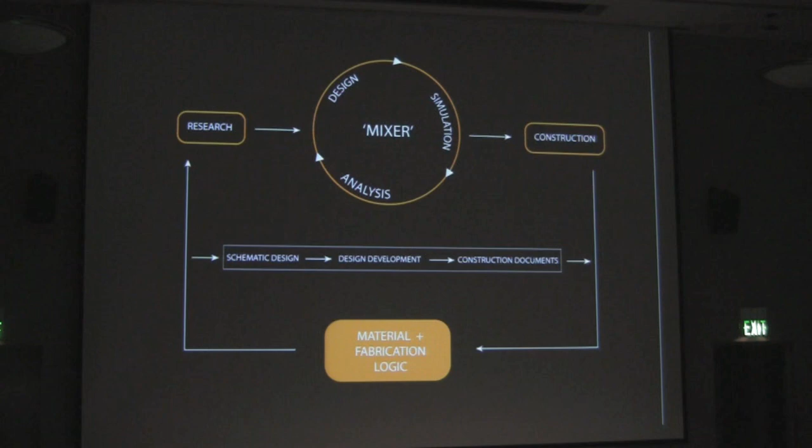So the case studies I'm going to show you really are, how do I embed this materials and fabrication logic into digital methods, really test these things for fitness through the analysis and through the simulation, to ultimately arrive at very innovative, very complex projects, but projects that ultimately can be resolved with traditional engineered materials.

Some of you have probably seen this project. I've talked about it before, but I think it's exemplar in trying to explain what I'm talking about. This is Janet Echelman's project in Phoenix, Arizona. Her secret is patience. For those that know Janet Echelman, she works in netting, fishing, trawling nets. And this is a very, very large one in downtown Phoenix that is effectively suspended by some hoops.

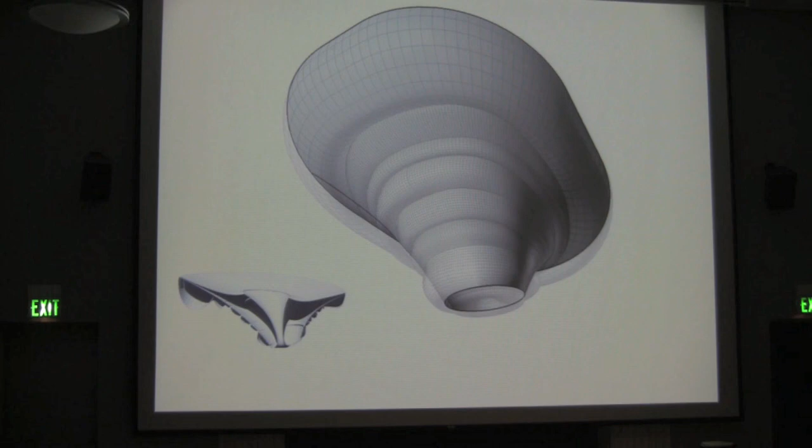It's composed of 3 layers, which is a central cone, an outer structural shell that holds it into place, and then this kind of lofty geometry that's almost like skirting. So it's 3 layers. The important part for an engineer is really that middle layer. That's the piece that holds it into shape and gives it its geometric positioning in space.

To think that you're going to actually knit something like this and know it absolutely, right? Because the building department says, okay, what is it? Define it. Is it going to actually be like this? How do you do that? You're not going to draw that. It's just not possible to draw that. And so working through digital methods, we did exactly that.

We went through and we talked to the fabricators. We talked about how you make fishing nets to understand what fishing nets are. So this is the modern trawling net, or a Euronet. This is a net looming machine. And the only information you need, you can make whatever you want in netting, with the proviso that you can actually give distances between knots.

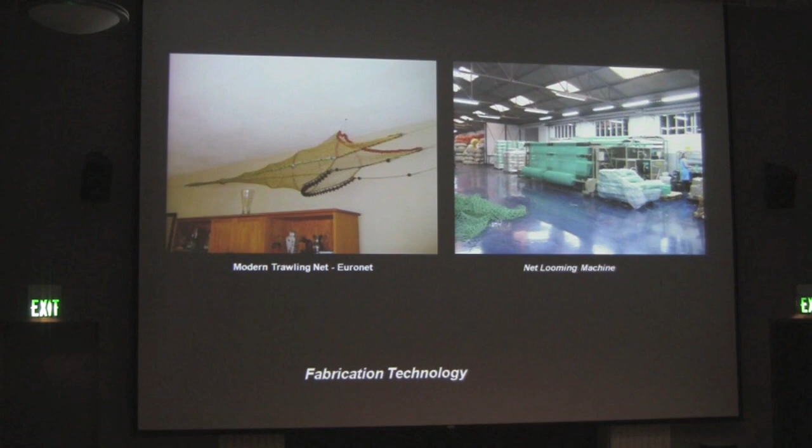That's all you need. So if I can describe that geometry and I can isolate what the distances are between knots, I can generate any complexity I want. And so that's the process. So arriving at how to get there is the challenge. So there's a looming machine, the netting. And this is just a visualization of an Excel spreadsheet. The Excel spreadsheet was all we had to provide as a deliverable to make the project.

The process is we wrote a whole series of scripts that we're going to embed in Revit. So much of what I'll talk about tonight is very much tool development. There is no bespoke piece of software out there that's a solve-all for anything. And so I've always had the vision and the position that my studio would be always software agnostic, meaning we're going to use whatever is the best tool at the time, and we're going to mix and match, and what's not available, we're writing.

We're going to script it, we're going to code it, but we're going to build that tool to do that process that's going to arrive at the project that we ultimately wanted. So this is the development of that tool in Revit. It ultimately culminated in this piece called the Echelman Net Layout Tool, which is nothing more than a drop-down in Revit, shockingly. And this piece will allow us to describe that geometry, then extend or throw or cast netting across the surface, and then we can find those nodes of the netting.

And this just shows how this thing gets woven together. You get layers, so you get rows that are stitched together. And you can see the coloration. We did a whole series of mock-ups to actually test that the logic held. So in a digital process, something like we're proposing here, you're going to produce an Excel spreadsheet and just run it through the machine and hope you're right. Boy, that's a mistake. Make sure you mock up. The mock-ups are really important. You test. You always go through this process of digital testing, digital mock-up, physical testing, physical mock-up.

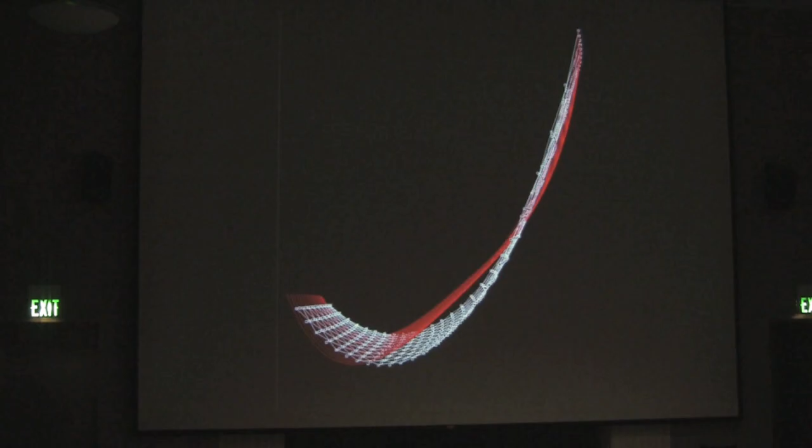And for the artist, they're only interested in the final shape. How you get to the final shape from the shape that you need before it relaxes, that's a challenge. So we had to go through that process. So this is the form-found shape, and you can see it starts to drape. So you see these little puckers coming through. Then the structural netting. This is the piece that attaches to the main ring and then drapes down. This principally carries the structural loads.

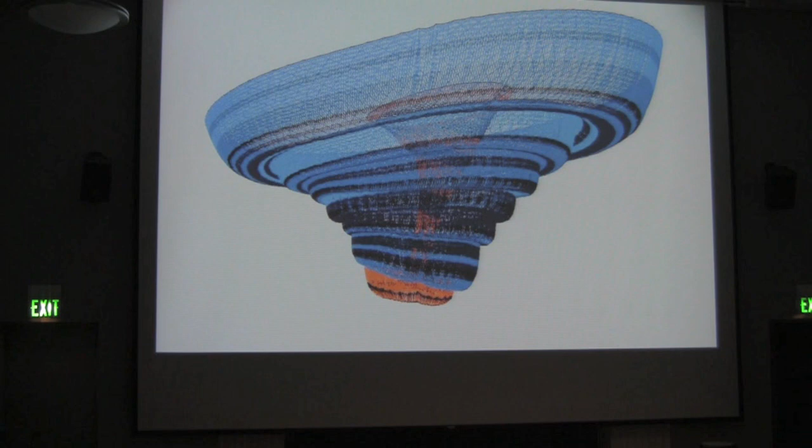And then effectively what is the piece, what gives it its form, is these drapes, these pleats that effectively fall down and are colored. And the coloration are the strips or the bandings that define it. So you can see the layers building up. So this is a structural analysis. Because it's data-centric, because it's a data-rich environment, we can bring that geometry directly into our analysis software. This is actually Robot, which is Autodesk's FEA solver. And we're looking at stresses within the nylon cords.

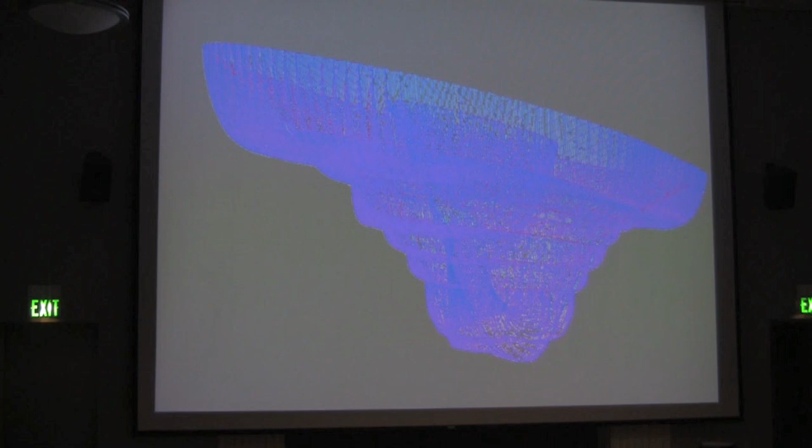What's important here is actually, again, that interstitial layer, which is the larger diamond pattern. That's the piece that's actually going to hold it into shape. And so we're just pushing this data between one platform, being Revit, pushing it into the analysis. So we're not creating two models to get that shape. We could then do additional analysis after we had that whole piece done. This is looking at wind. So that's 30, 60, and 90 miles an hour wind. Obviously in Arizona, everybody's concerned. So we could understand what that behavior is actually going to be like under these load cases.

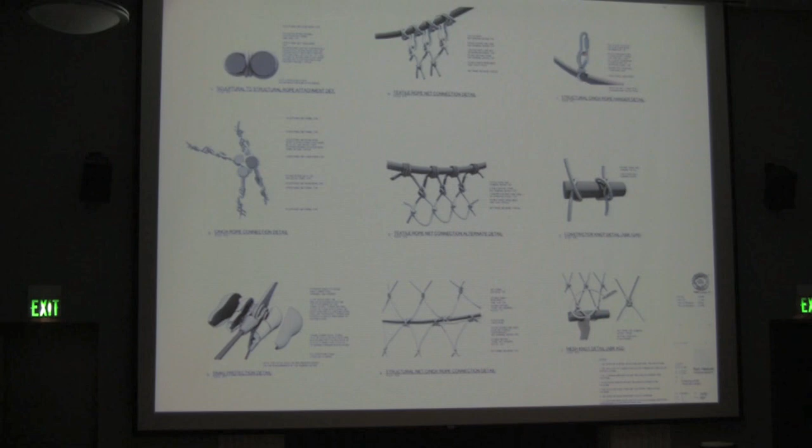Any jurisdiction is going to want documentation. And whether it makes any sense, whether it really tells a story or not, you still owe documentation. So here's your plan. You get a ring and a ring. You get some pretty pictures. Say, we need some nets. We have distances between knots, so that geometrically describes it. The hoops to tie it all together, and some details, and we pulled a building permit. So we pulled the building permit, and this is the piece actually installed.

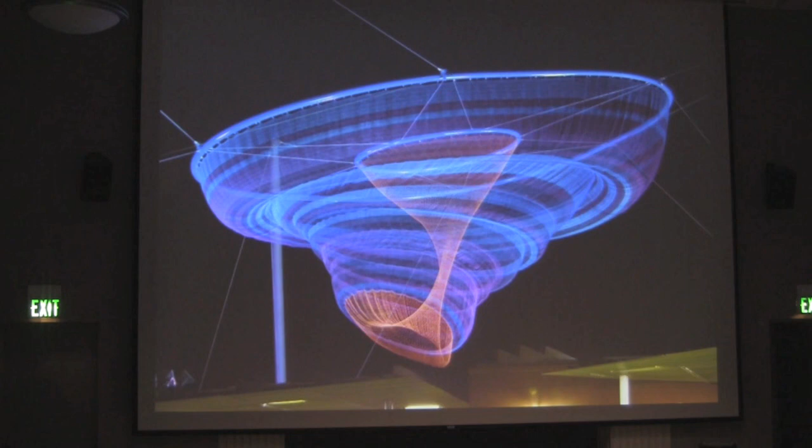It's suspended in the air by 3 masts, and then the hoops. You can see the hoops going in. There it's lit up. Inside. It simply arrived in a truck. So they made it in Europe, put it in a container. Container got on a trailer, pulled it out. It took longer to put the masts up and hang the rings than it took to hang the net. The machine knit all of that netting within 2 weeks. So purely off a digital piece.

The next project I'm going to show you, it was a competition. This was at CCA, California College of Arts in San Francisco. This is the architecture school there. A firm called Buro gave a proposal. They had a skylight issue. This solved the skylight issue. Very bright light coming through the skylight and creating glare within the space. They wanted to fill it up with something that actually would diffuse the light better.

So Buro came up with this design of this faceted kind of paper-like lamp shade piece that was going to fill the space. They won it. They won it with no engineering input or anything like that.

Well, a friend of mine, having worked at Wes's office in San Francisco, he called me up and he said, I have a friend at CCA. He won this thing and now doesn't know how to do it. It's a complex thing. It's kind of curvy, doubly curved. What does he make it out of? What's it of? How do you do it?

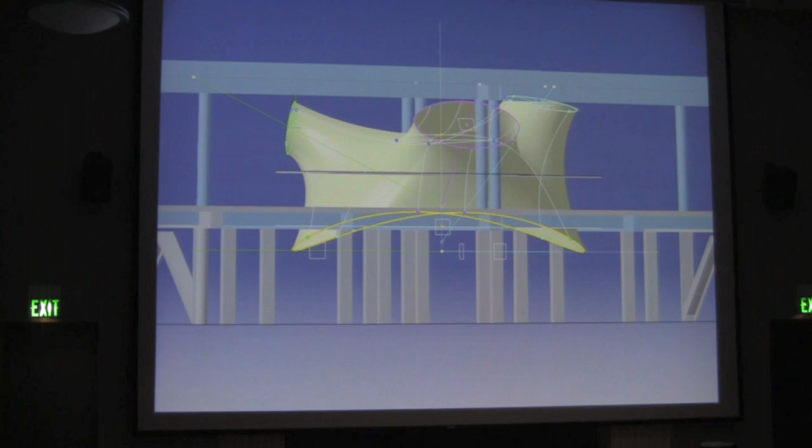So this is the CATIA model that effectively describes the interrelationship between the building and the piece in a sectional case. We work often on these very complex things operationally between Rhino and CATIA from a geometric point of view. It's just a way that we can manage precision, work out some of the ideas, and then lock it in a parametric way. So this is building up the principal geometry of this light shade.

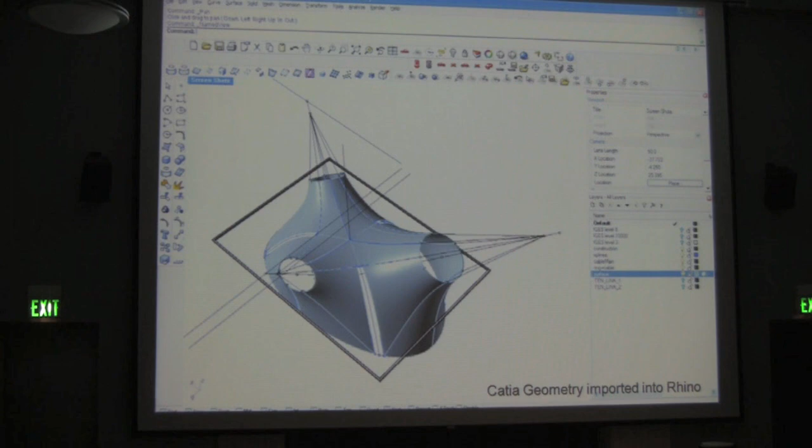So here's the CATIA geometry, defining it, and I'll talk about how we get to the cable net. We've got CATIA geometry, and we're going to import it into Rhino. We're going to tear that geometry now apart. We have the principal lines of curvature between the two openings. These are the hanging points, 1, 2, 3. This ring is actually what we use to tension the whole thing.

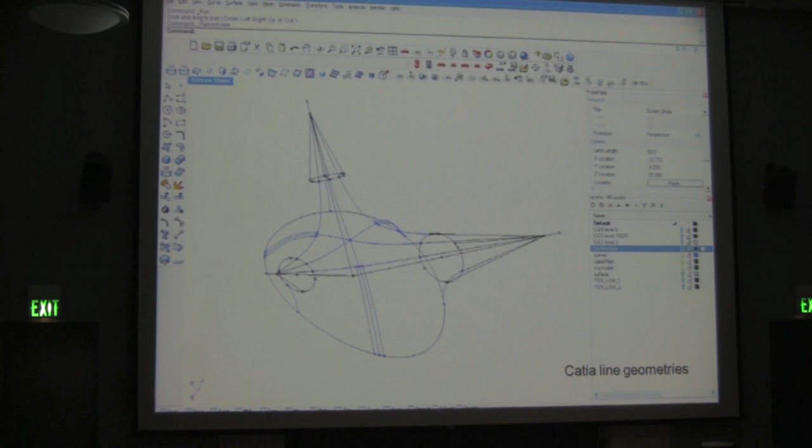So cable nets, if anybody knows what a cable net is, it's got to be tensioned to lock in the pre-tension. And then we got the primary geometries described. Governing geometries, obviously you've got the 3 rings from the top that actually get locked into space, and then the cable net gets hung from that, and then you got the lower ring, which effectively pre-tensions the whole thing. So you've got your governing geometries.

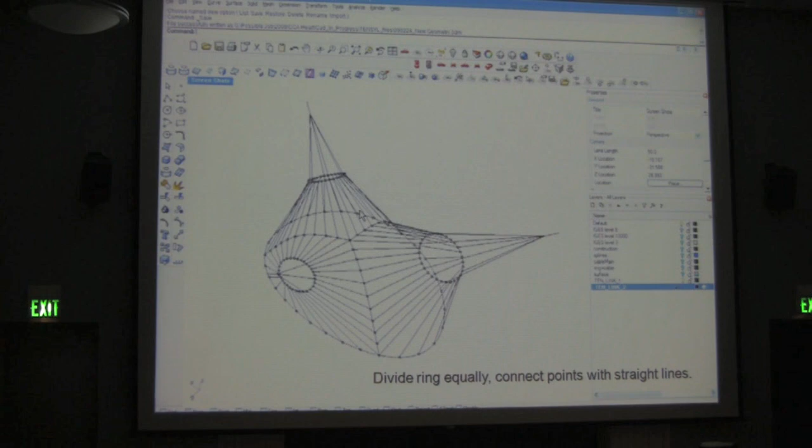We're going to now develop the cable net, which is, we're going to subdivide the geometry, so you can see the subdivision, and we're going to break this into equal node points, and then drag a cable net line across, so we got transverse geometry. Now we can panelize this thing. So this is going into Tensyl, so we have a cable net, and we can actually relax this surface, so we're going to form find this thing.

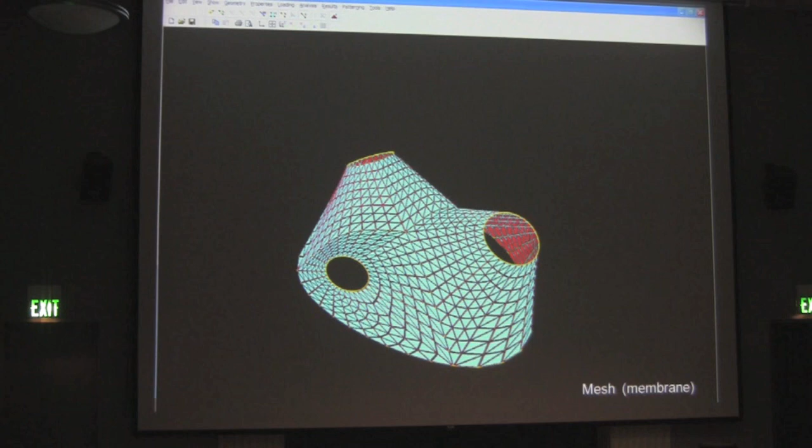We've got our fixed geometry, which is locked. That can't change. It's a rigid element. We have our interface conditions between the primary geometries. We've installed the mesh, because we're going to panelize this thing. We've got the support conditions established, and we form find it. So that's a relaxed shape, right? So everybody saw the surface make the step.

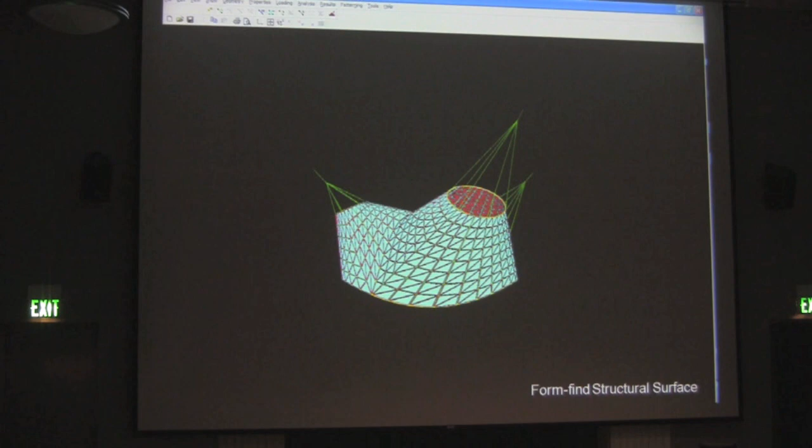Here you go again. You can see the hard line of the cable net, the principal linking geometry between, and it relaxes. So again, that's dynamic relaxation using Tensyl. And just one more time, you can see it relax. So now we have all of that. So we found this surface. We have a cable net defined.

We now need to do the FEA because we're going to switch out cables, so we can't guarantee that we get pure tensile forces through a cable. We're going to put it through panels. And the trick is we're actually ultimately working towards HDPE, which is a plastic material easily cut from a laser cutter. So we can actually panelize this thing. And you'll see the madness in going to that. We want to do some tricky stuff with what the surface ultimately becomes. So we import it into FEA.

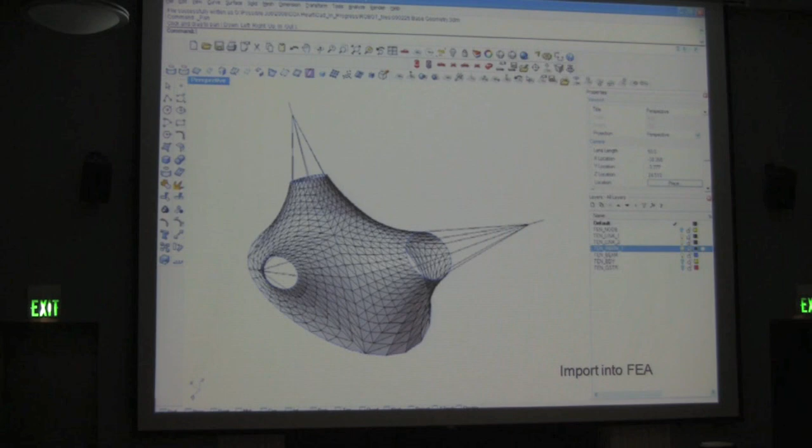So it's a nonlinear cable analysis. So we first look at the cable analysis, look at the stress in the cables, look at the jointing, make sure that we get what is the connection between the panels? Is it one rivet, two rivets? How big is that rivet?

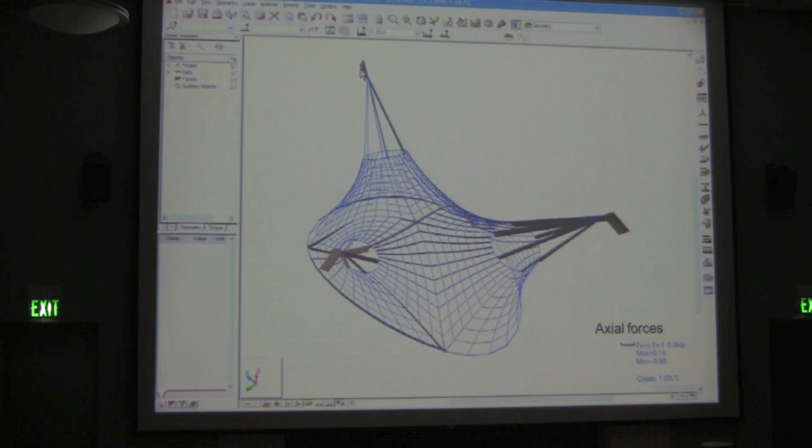We get the axial forces defined within the support conditions. So these are cable-tied rings. So here's your ring, here's your cable, that's your fixed point. And then we can find the deflected shape. Ultimately, in these types of structures, you're looking for the solution with the least deflection.

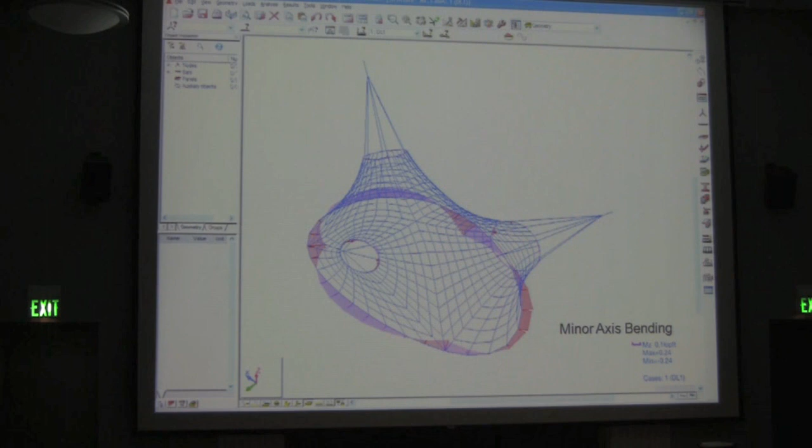Ultimately, a form-found structure has the greatest level of stiffness, and the deflected shape will be the least. So that's the deflected shape. The bending axis, this is bending within that ring. So imagine the cable net's now pulling on that, and that ring is going into compression. Again, minor axis bending.

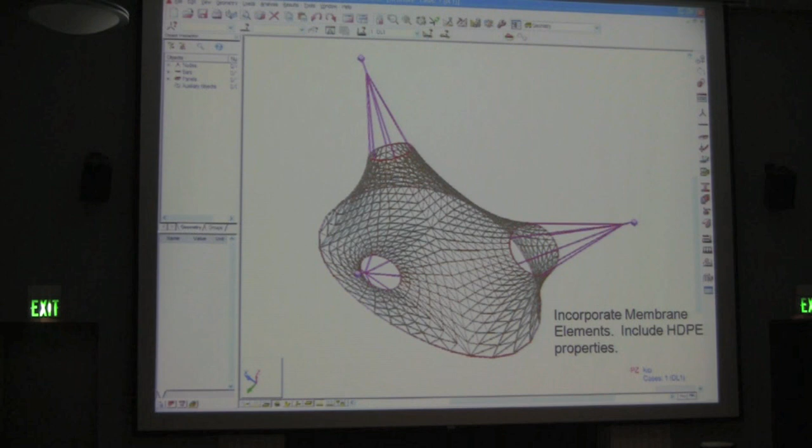So we've now incorporated the material properties into the model, effectively putting in membrane properties. So this is the HDPE plastic. And again, we're going to do this again. So there's a rigid panelization in each one of those membrane elements, looking at the deflected shapes. You can see this kind of dark shading piece. That's the offset from theoretical, yeah?

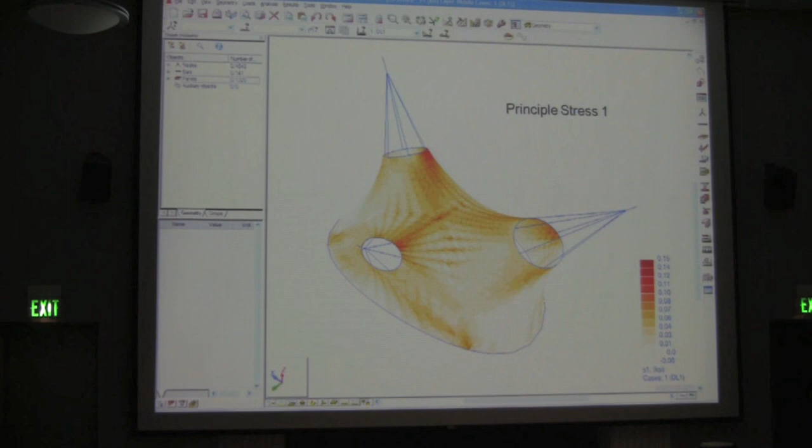Or the deflected shape. So the axial forces, so we're going back through a process of confirming that. So you got the reactions, right? So now we can properly size the connections. And then looking at the principal stresses, you want a good uniform character to these surfaces and the stress profiles. Principal stress 2.

So I said there's a method to the madness of actually going to the membrane. Why not just leave it a cable net? Well, because we wanted to panelize it. We wanted to use panels, and we wanted to do something nifty. Initially, the surface was just these overlays of plate material. We talked and talked and said, well, what happens if this could be furry? And so we devised a way that if you cut these kind of Cs and you bring them together, you get this kind of a loop effect, and it becomes this furry surface in the process.

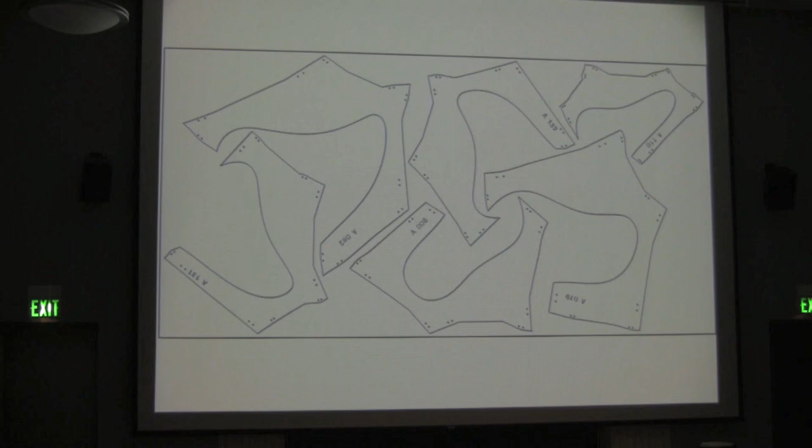So this is just the panelization and the element development. So this is one panel ready to be sent through the fabrication process, CNC. And here's it going installed. So each one is uniquely numbered. And you can see how the furriness happens. Effectively pull it together, and the surface bends out of shape to create this furry characteristic. It's quite tight, right? This was built by students, so it was one of those very, very interesting projects to work with students.

Well, how do you design something custom for a big rock like that and know that what you've designed is ready and able to actually load up this big rock? Because you've got something that's very unique from a geometry point of view. Well, we scanned this rock. So we scanned it digitally. They lifted it up, they scanned it, and we got the digital information.

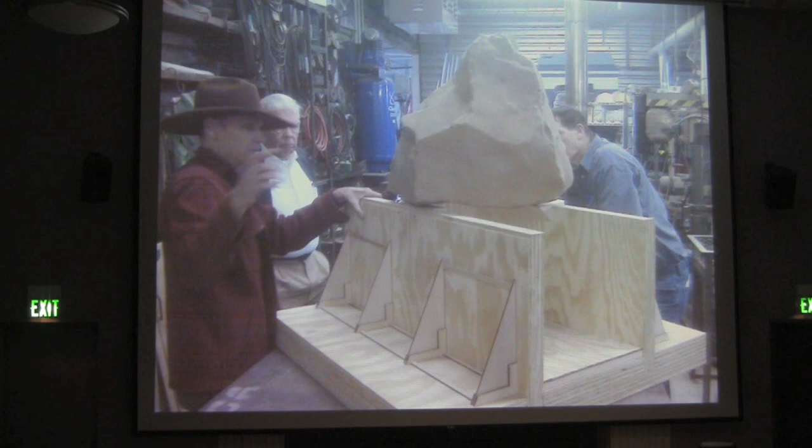So this is my first meeting. That's Michael Heizer in the hat, out in Nevada. You have to fly to Las Vegas and then drive 6 hours to go see him out in the middle of the desert. He's completely off grid in an outpost, just making stuff, and it's really incredible. And he's old school. He's making stuff by hand, super, super precise. He'd never worked in a real digital process ever.

And this had to happen. To take a rock and move it somewhere and know you could just drop the rock on this trench idea was a big step. So this is his mock-up. This is the idea, and you can imagine this conversation. I have this big rock. I want you to engineer me a trench so I can drop the rock on top, and I'm going to call it Levitated Mass.

It's funny until somebody realizes that that costs millions of dollars, and you're either right or you're wrong, yeah? And that could be a real big crisis. So we scanned the rock. How we got the rock is actually through that 3D scan. So I showed up with the rock. I had the rock scanned, and I came on the plane. People looked at me very funny, holding my rock. And then I showed up, and he had this trench, and luckily the rock and the trench somehow met.

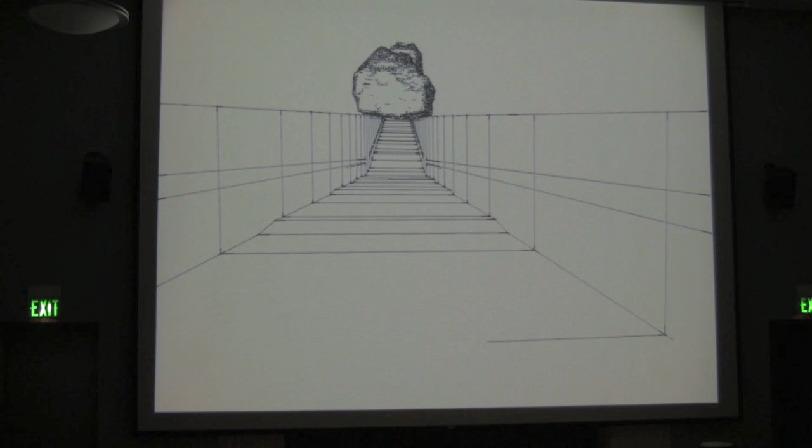So this is Levitated Mass, the rock, the trench, and you're supposed to walk under it. There's your sketch. There's under. And there's the lay of the landscape. So that's plan, right? That's all you get. That's the idea. So we had to be very specific.

We had to have the digital survey. We have the site, right? What is the run? I mean, there's all of this geometric information that has to be embedded. What's the code slope for a ramp? What's the code slope for a landing? All of that stuff had to be plugged in to actually develop that. And that had to be presented because there was an idea of art, and how do you merge the two and make everybody happy. And you can only imagine my conversations with the city.

I want to do a rock. I want to take a rock. I want to put it over a trench. I need a building permit for this. What do you think? The juggling, and ultimately what they said: this is a building. By the way, the city understands this as a building. We pulled a building permit for it.

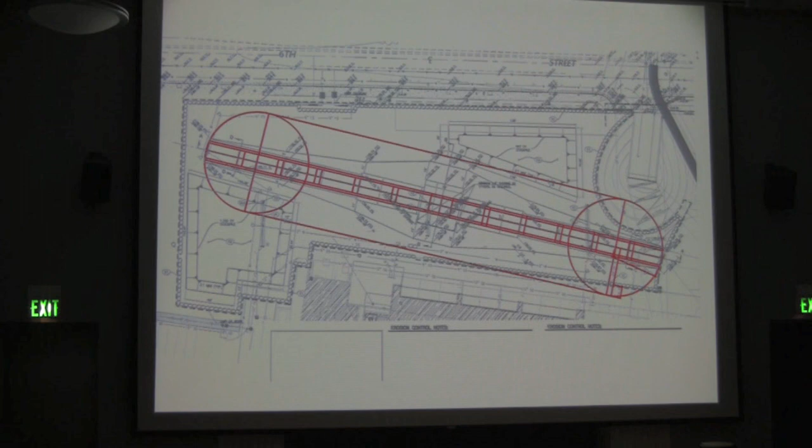So we built a Rhino model, we kept everything in Rhino. We have the geometry, which was a 3D scan, and we could work with and ultimately evolve this geometry. We had to go back. Don't ever do this. Make sure you get more information than not. 3D scans are expensive, but they're super cheap relative to lifting up rocks. We did it twice, which did not make LACMA very happy.

But obviously on the bottom side, how the rock lands on the top of the wall is super important. And the resolution of that underside scan is super important, because we're going to have to put in shims to support this thing so that the rock is stable. Because there are these things called earthquakes in California that the building department was incredibly terrified of.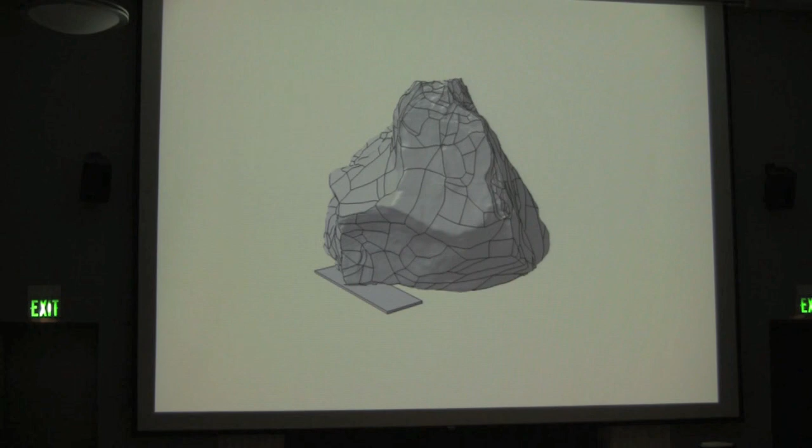So we had to get a whole party of geotechs together to agree what an acceptable or allowable state of stress is in rock. We had to get a whole other party of structural engineers together to agree what acceptable overturning is and how you actually transfer those forces through the system.

So there's your scan. This is looking on the underside, and here's your projection of those plates. And because we had the geometry of the rock and the plate, we could now begin to spot grout and the shims to effectively lock the rock into place. And then we weld the shim, right?

And why this is important is because the city wants to know what that is. They want to know how long a weld you're going to use, because they're going to come and inspect this thing. So you can't just go out there, land a rock, do whatever you need to do, and then at the end push it and say, okay, it's stable now, we're done. You've got to build what you have on your drawings, what's in your documents. And that's the risk, that's the complexity.

So this is the analysis. We did this in ANSYS to look at the overturning and the distribution of stress on the grout beds and the shims.

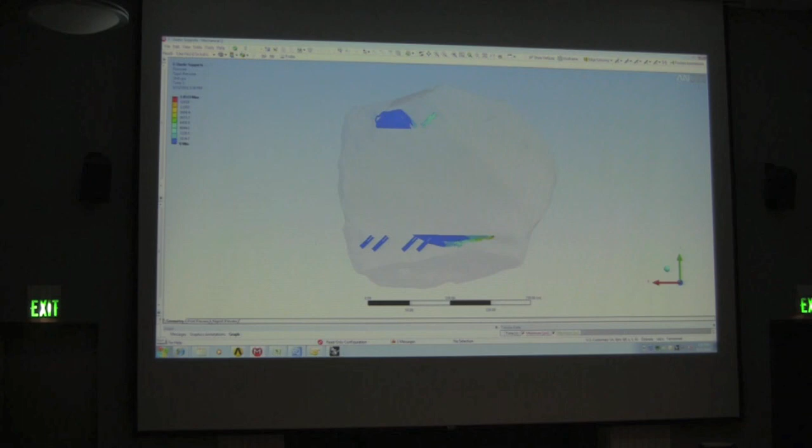Blow up details of that. And then the details of actually designing the shim, meaning we have to be spot on. As I said, the city wants to know what is the shim. You can't just go out there and chisel on it and ultimately arrive at, well, it's stable now. It's specific.

So to build up all of that, and that's all geometrically modeled 3D information, virtual prototype. And then, again, I'll always go back and I say, look, you know, so we got the rock landed on some plates, but then there's this concrete piece. It's a piece of art. It's not a piece of civil infrastructure.

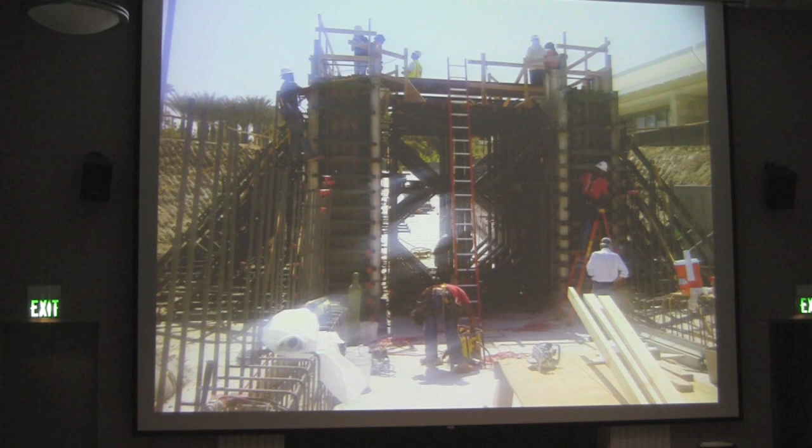What's it look like? What's it feel? What's the finish like? You got to mock these things up. So we went through a whole world of physical mock-ups, digital mock-ups to ultimately arrive at the final solution. So that's the mock-up. This is the grout bed and an anchor for the rock, anchor going on the underside. And then the buildup of the shuttering for the rock chamber and the details.

And you know, this thing's so precise. It's a piece of art. The expectation's so tight. When you go to a construction site and the expectation of tolerance, I mean, you could get things 5 foot out of line. And being able to go there, so Ron Elad was the field engineer on this. He went with an iPad, so he had the digital model.

He could drill up whatever information he wanted using an application one of my guys created called GoBIM that allowed him to drag in real-time 3D information specific to the location so he could inspect it and make sure that we were on point. So there's the chamber. You can see the shelves that effectively pick up the rock. Massive.

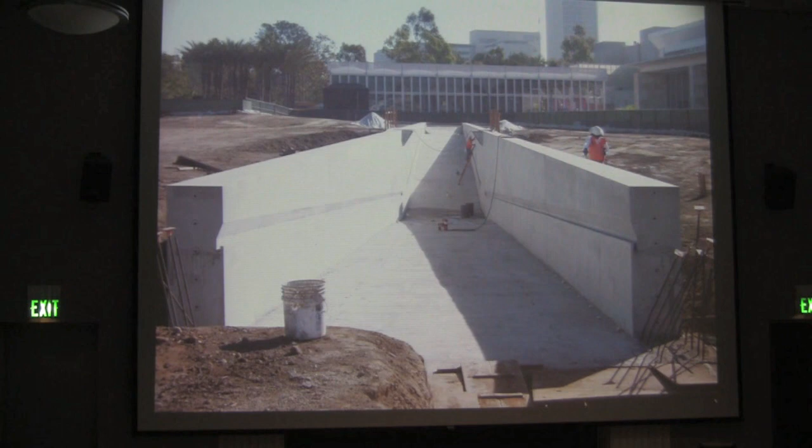So we're waiting for a rock. So yeah, that's soon to come. That's the Christmas present. They're going to drop a rock on top of that. So it seems like it's moving out. We're already a few months late, but hopefully we get a rock soon.

The next project I'm going to talk about is a project, I've done a lot of these actually. This is a material study at SCI-Arc that Tom Wiscombe, he's run a materials lab for many, many years. And I've worked with him in this materials lab since I came out, 2006. And we've always explored very complex materials. This one wanted to explore the idea of composites and using some kind of very extreme amorphic kind of architecture.

Because if you know Tom, he's always interested in these kind of emergent systems. So he said, Greg, what is the one input you can give to the students to put some intelligence to making some weird amorphic thing, but yet have some emergent structural behavior? Well, he always starts with the cantilever because that's the most difficult, right? And I said, well, if it's a composite material, you've got thickness controls because you've got cost. Why don't we play with folding? What happens if you fold, and what does folding do to stiffen up this thing?

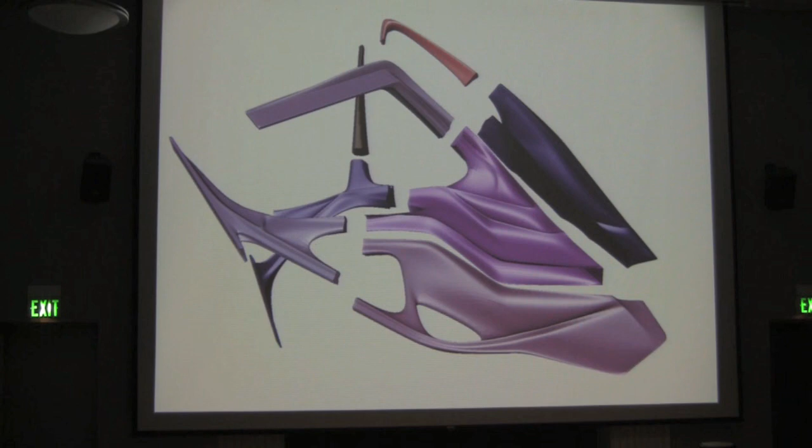We worked in a Rhino ANSYS interface. So we used Rhino geometry, and we just kept pounding it through ANSYS. ANSYS is a high-end finite element solver, which ultimately allowed us to play around with where the ribs are and what the attachment points are. So parametrically, we just worked our way through good supports, rib stiffening, and they always had some clear idea about what this cantilever was going to be as a formal thing.

And so this was a small model built up. The orange piece is really some taping, so it has nothing to do with structural. It's purely an aesthetic. Tom called it a tattoo.

So that's what the tattooing of the skin is. That was the mock-up, so that was a semester end. They built this. So the original mesh, so when we started this thing, we take the Rhino geometry, pull it in as a surface. There's some level of meshing, right? The meshing basically defines the surface, allows us to look at that surface and actually begin to understand through the analysis process what the interaction is between each of the mesh elements.

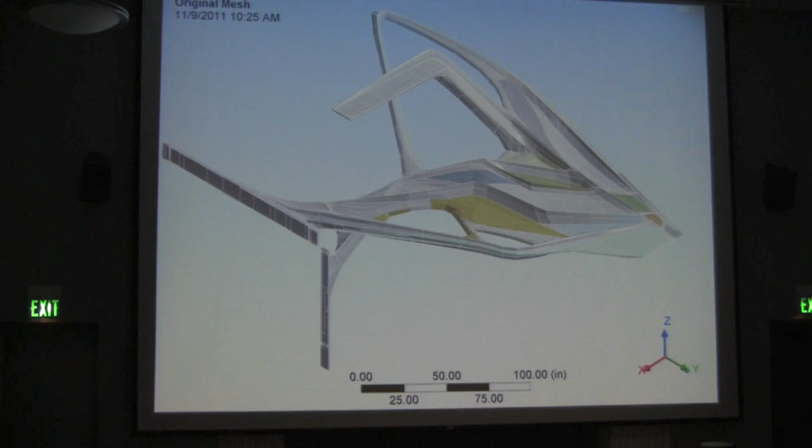Something this complex, you have to go through a process of refining this mesh, and you can see the density of meshing that's actually happening. Now, you just don't want to let this thing go. You don't want to just maximize the mesh, because the more dense your mesh, the greater the computation power you need. Meaning, at some point, you'll extend yourself well beyond the computational power of the computer and or the software. So you have to really be frugal with your decision making and how you do it.

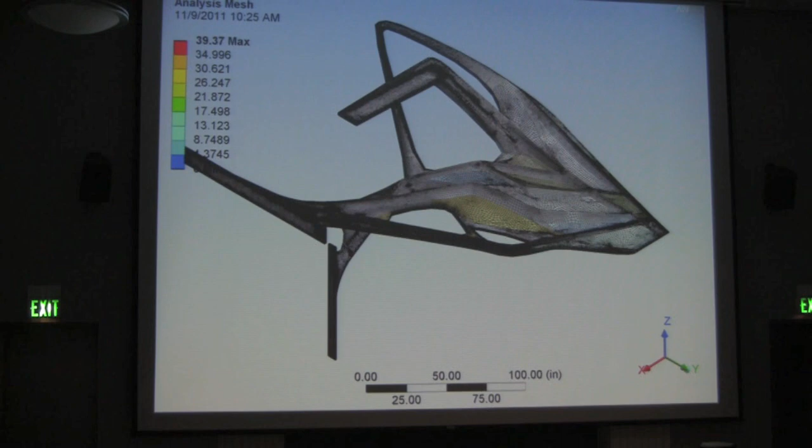This is iteration after iteration of refinement to actually arrive at this mesh. Still dense, but to arrive at that. So this just shows the logic of that. We've written a whole world of scripts and tools that effectively help us mesh. So we're looking for characteristics, and specific characteristics will then intensify the mesh in localized areas. So you can clearly see that anywhere that you get an edge condition, that mesh really gets quite dense because it's attracting stress because of its stiffness. So again, looking at the mesh development.

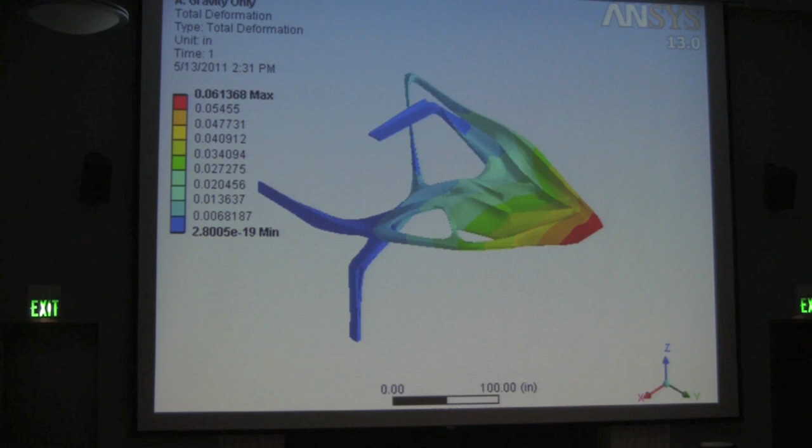So then the analysis, really looking at deflections, but I'll show you factors of safety as well, and mode shape and mode. So this is gravity. So of course the tip is going to be the greatest deflection, which is here. The supports are the blue, obviously. What happens when somebody hangs on it? And we actually tested it. One of my guys, JP, who's a college mate of mine, jumped up on top of it and started bouncing on it. So thank God we did the dynamic piece. So that's the tip.

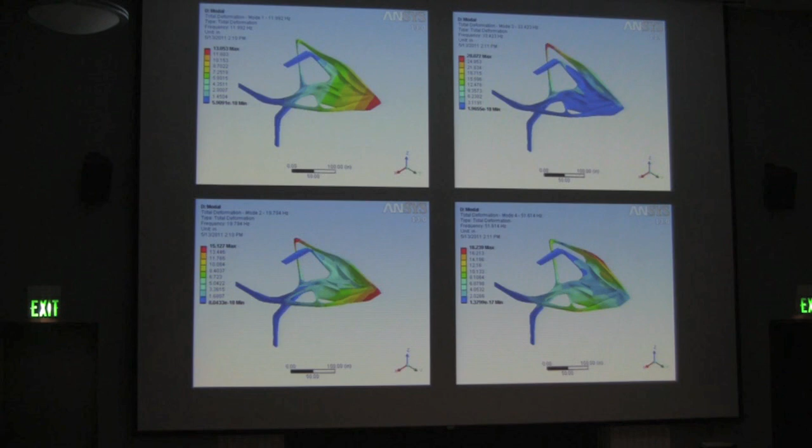Loaded loop, what happens when you actually have a weight attached to the loop, which is this piece that extends out. Then these are the mode shapes, and we're really looking at frequency issues, wind. You say it's in the building, but because it sits next to those double doors where you walk down the main hall, and people prop that open, on a good windy day, you could get some pretty good. So clearly you want to pay attention to the dynamic phenomenon.

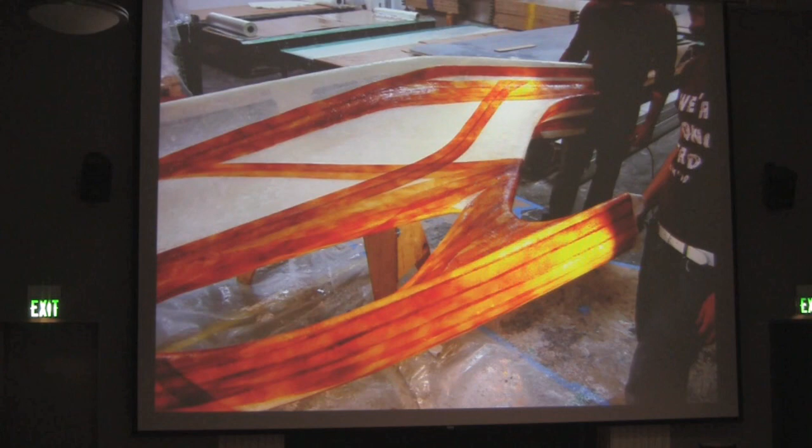Ultimately got to the detailing and the manufacture. So this is what the taping or the tattooing looks like. What it looks like with light coming through. You can see the ribs, how it stiffens. It had to be of weight that they could lift. There was a limitation in what they could actually hoist into space. They had to assemble it on the ground and then mount it to the points, 3 points. The hanging engineer, dangling. And then the piece installed. So this is still over there if anybody's interested in seeing physically what it looks like.

The next project I'm going to talk about is a project that I've done with Cliff Garten. He's known for doing these totems, stainless steel wire totems. This one is in Dallas. It just got installed. It has a height to width ratio of 13, which is outrageous for a high-rise tower. So obviously wind. This is an outdoor installation. And I love these projects because it's pure structural engineering, and incredibly fun.

So Cliff has a whole world of these really talented guys that have come out of industrial design that build these really beautiful wire models, that then he can print beautiful 3D prints of things, and then he sells these things to very rich benefactors who then are willing to build these things. That's great until somebody says, yeah, I'll buy that, but that's a very difficult proposition actually to render it in stainless steel.

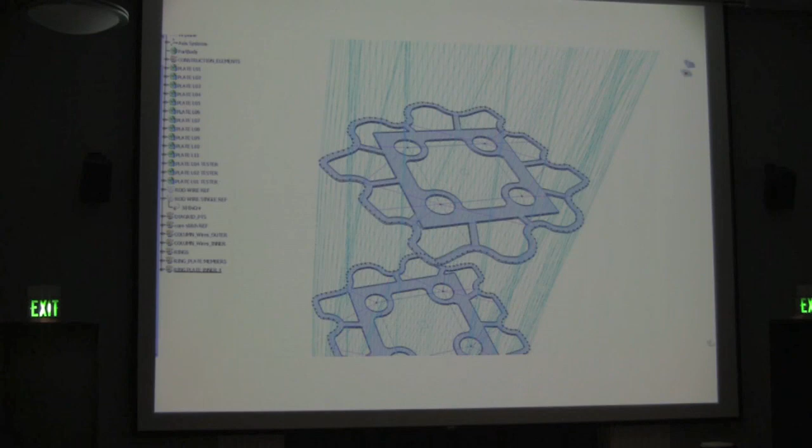So ultimately, the fabricator, all he wanted was CNC files. He wanted us just to say, this is the amount of wire you need, the CNC file for these outrigger pieces, and then the rod, and then he was done. He was just going to assemble. He didn't want to think about it. He didn't want drawings, didn't want anything. Just tell me the parts. I'll put it together. So this is the model we did to do that, all in CATIA, all the plates that hold it into place.

This project is difficult because we're cold bending the stainless steel. So if you can imagine, if you twist something and it's got vertical elements and there's stiffness, as this thing rotates, there's rotational stiffness and it wants to untorque itself, right? So we're fighting that, which we resolve by actually putting in this internal core.

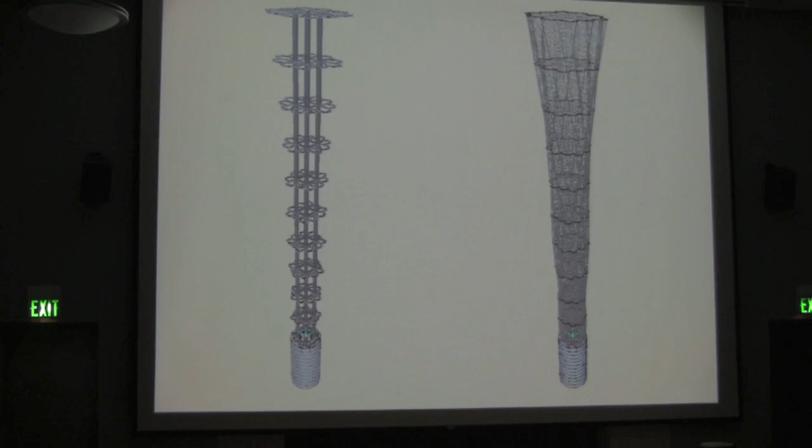And this better explains it. So you can see how these things rotate as they go up to develop this kind of thing. And so you can see this central core, and then you can see the wires that effectively go around. Ultimately, at the end, there's an LED light, a very high-powered light that goes up through the center and lights this thing up. And because it's highly finished stainless steel, it glows.

So the structural analysis, getting the information into structural analysis is difficult, and different jurisdictions always want to have different information. In this case, we use SAP. SAP is more common on the West Coast, predominantly a US product. The city, or the building department, we had to get a permit for this. And they understood it as a skyscraper. Not an art piece, not a monument, but they understood it as a skyscraper.

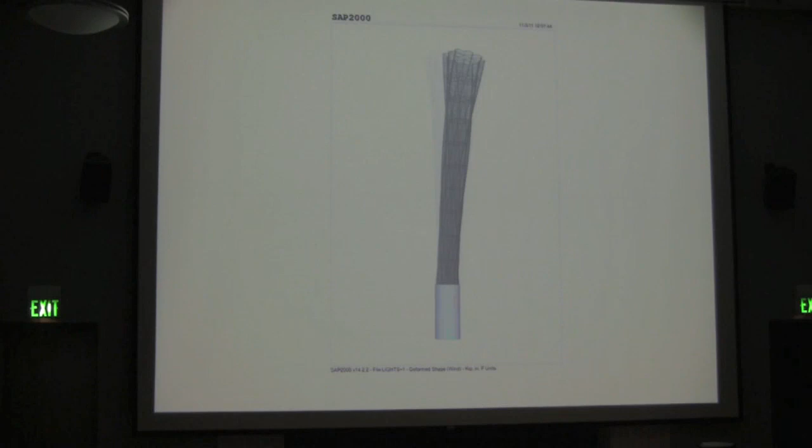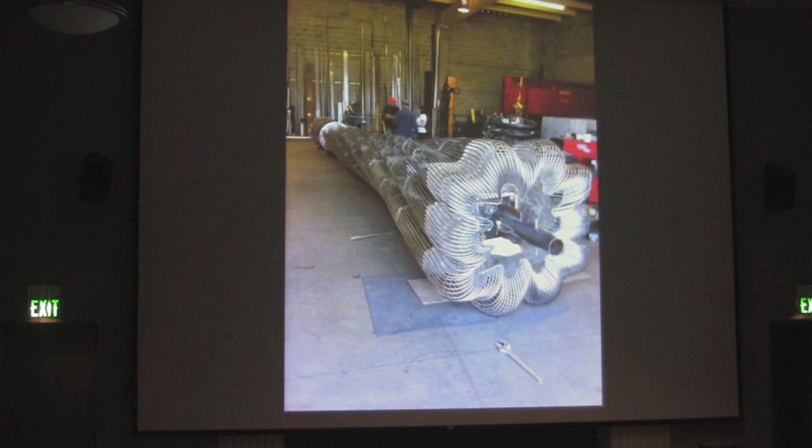This big central core, anytime you're building things like this, you have to think about how you're going to build them. And I can tell you, I've seen art of large scale where they've built it in the shop in one position, namely on its side, and nobody thought how they're going to right it. Millions of dollars just lost. So that's that. That's the anchorage. So it's got a central core, anchor bolts, attaching it to foundations.

We shipped it in a truck. So it was manufactured in Utah and shipped to Texas. And you can see the rod. It's simply just bolted. This rod goes all the way down to the base. It bolts. So once we get it vertical, we unbolt those 4 bolts, and the thing just literally lifts right out. So we need a fairly high crane. Also important to know what equipment you need to install.

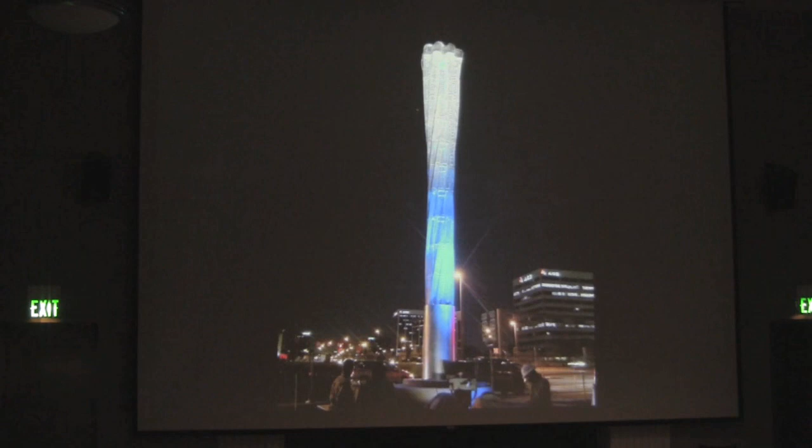So there's it going in. There's Cliff checking it out. And there's it lit up. Okay.

So inevitably, I always stand at these things and talk about complex art pieces, and somebody will always say, well, what about buildings? So I'm going to talk about a building. This is the Anaheim high-speed rail station down in Anaheim.

It's for those that don't know Anaheim but have driven past, which is probably the better choice. I hope nobody's from Anaheim.

This is right by the Angels ballpark. What's interesting about this project, I think, is that the city wanted iconic architecture. They went with a very non-traditional American approach to building, meaning from an environmental perspective, it's a really pushed design. It's a LEED platinum building. It's got an extended comfort range.

So with that much glass, it's very, very difficult to actually keep it in a tight band tolerance from an ASHRAE perspective. So you've got to extend that. So you've got to accept a different level of performance. But it's a rail station. People are going to pass through it. So does it need to be conditioned like an office building? Probably not.

So all of that went through. It all got approved. And costs became prohibitive, right? You can't do glass. You can't. And the discussion went, well, what about this stuff called ETFE? Well, those are those pneumatic pillows that you see the European guys do. And this one, in this particular case, that fit the budget, about $150 a square foot.

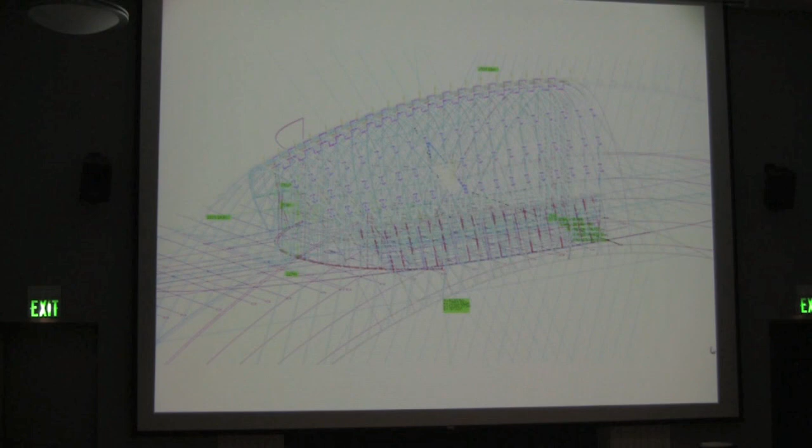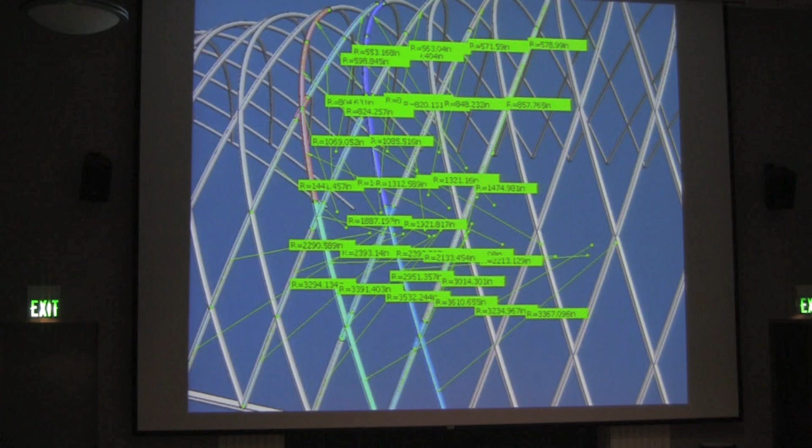The complexity of this thing, and you can just see it in the diagrid roof structure, is the deviation of the radius as it cranks itself around. So super, super complex. This thing is constantly torquing itself as it's going around. So we have that information, the centerline geometry. We can now develop the 3D object families for that surface.

So there's the pipe of the diagrid. There's the channel that's actually going to hold the ETFE and the clamping mechanism going to attach to. There's the gutter and the sidewall. And then we can keep independent, for the moment at least, the end walls, because these are things in and of themselves. So there's your entire database built up on the side. There it is in plan.

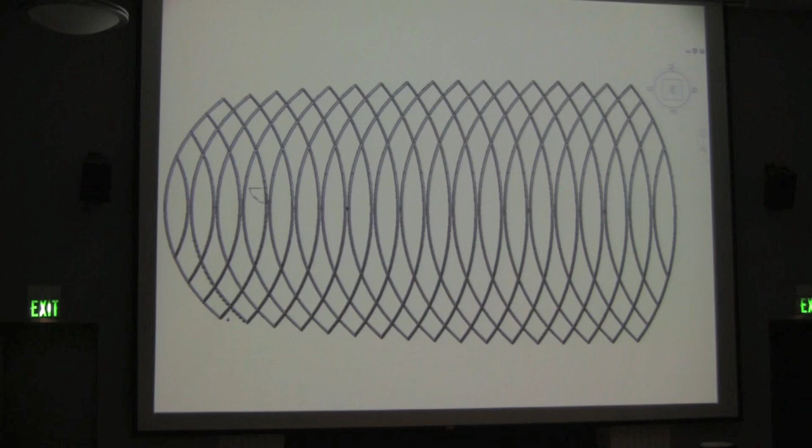And we were working between Revit and CATIA, and this was just really a test to make sure that we could get that geometry in early, actually check the structural analysis, so we can actually get that information into Revit through a link. So the geometry of the roof, this is the normal arrow to the surface.

Each one of these tubes is effectively just tracking that surface. Yeah? The problem with these arrows is they're actually slightly rotating apart. So if you kind of did an array, they're always kind of marching along that way. So they're always pulling apart.

Well, if you've ever done an aluminum extrusion, or you know anything about an aluminum extrusion, you can bend them, you can torque them to some degree, but you darn well can't do a lot of torquing and a lot of bending. It just won't happen. And so this was a huge problem, and how you're going to actually resolve that. And this was one of the first big problems that the fabricators started to say before we were appointed. They're like, well, we don't even know how we would even bid this if we wanted to go design build, because we don't know how you would resolve that piece.

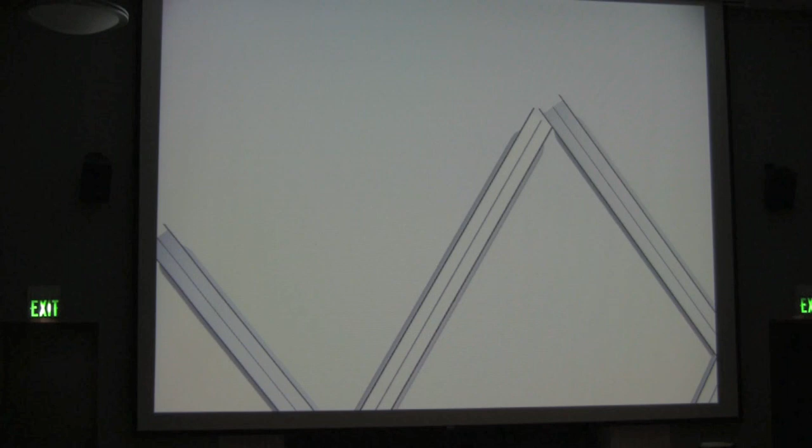So we actually worked and we pulled off some logic from Seele. They used it on the Munich Stadium, Allianz. I'm going to tell you a little bit of the story about why this thing doesn't work. So this is the track. If this track just tracks that geometry, so it doesn't rotate to stay normal, this is what you end up with. This is the top, this is the crown of the shell, and you end up with this clash, in other words, they don't come together, and so you can't close the roof.

You can also see what happens if they just continuously track. You can't make a node. So you can see the node clashing. There's a blow up of the node. So you couldn't even drain that.

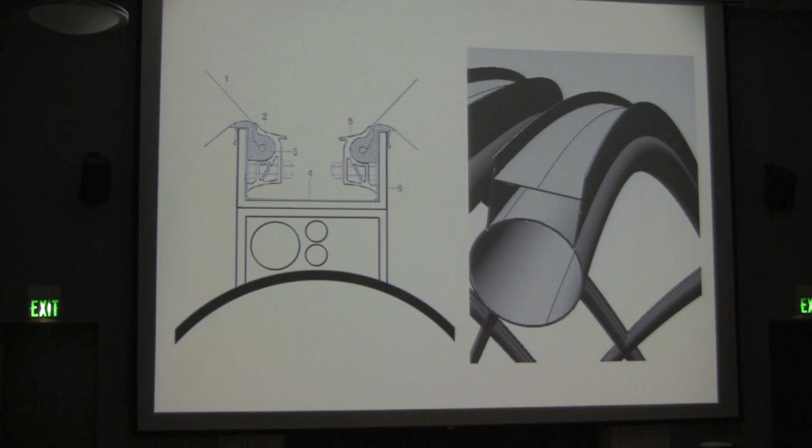So this is the detail that we used from the Allianz project. This is an EPDM gasket. The ETFE foil. The foil is like sheet material, so flexible, and then aluminum extrusion. And we could segment the extrusion. So we still got the tolerance control of the aluminum extrusion, but we could now handle it through the pipe, a chair, which offset it from the structural pipe, and then a channel in structural steel. And because it was a channel that had flat surfaces, we could actually build it up from plate material. So we could effectively unfold it and actually have a developable surface, meaning we can cut it from flat stock. Now the torquing element is completely eliminated from the project. So that's how we arrived at it.

So this is the unfolding of that channel. And then the development of those node points. So there you've got to do some cold bending to actually develop that node because you're dealing with two geometries. But we can check that through a tool in CATIA to see what that extreme case is and make modifications accordingly to make sure that they're still within a cold bending position.

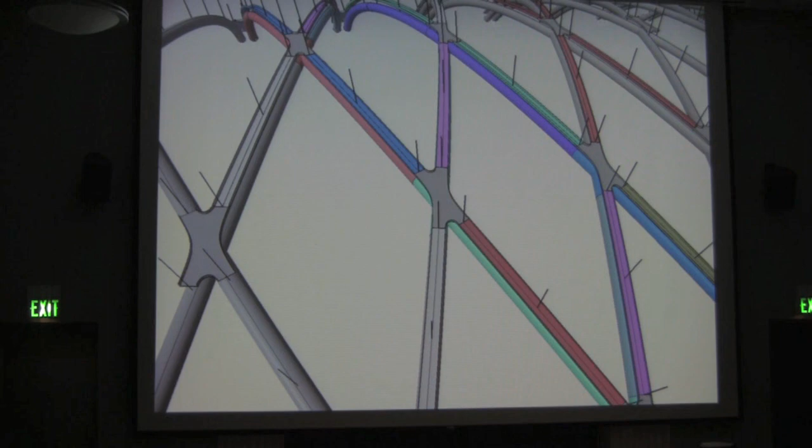And then here's that drawing again. You've got the normals, you've got the channels, you've got the nodes against the structural 16-inch pipe. And we now have an entire system that now is ready to be clad with ETFE foil. And here's how it arrives at the ridge line, or sorry, at the gutter, the sidewall, node, top, and the details.

Again, we're always working in this virtual prototype mode. It's hugely important. You can easily get yourself on very large projects and very complex projects where you need a mock-up, a physical mock-up, and that physical mock-up can be $3 or $4, $5 million. Yeah, and oftentimes you're fighting that. I mean, you're talking about a mock-up you're going to make and then discard, right? Because nobody will ever allow a mock-up to be incorporated in the work, or they shouldn't, particularly if you're using it for testing.

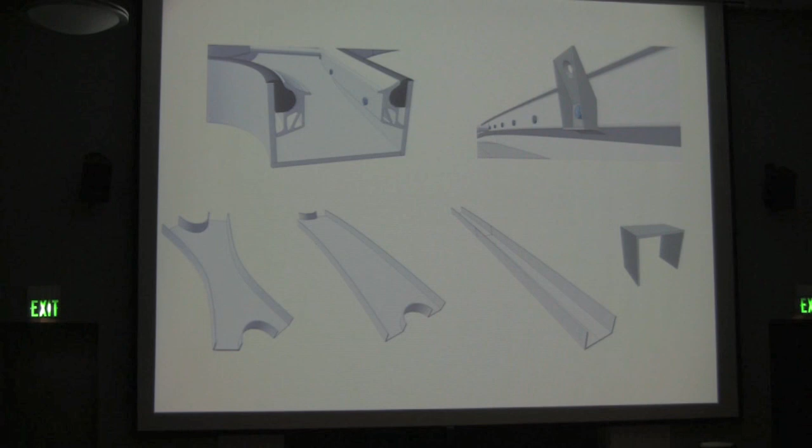So virtual prototyping is an incredible way to actually make sure that you get your tolerances, you get your connections, you get your details developed in a way that you want them. You can also begin to start to check for performance, particularly in structures. We can test, and Anders' firm, SCIArch, does a lot of that virtual mock-up testing.

So this is just the details of that being developed. So here's the conduit. ETFE, these pillows, they're pneumatic, so you're supplying about 7 pounds per square foot of pressure. So not high pressure, but nevertheless you're supplying it. So here's the tube that connects it. That's 3 layers built up, so it has two cavities, and that gives us structural properties. And then the detail of the crown and the pillows.

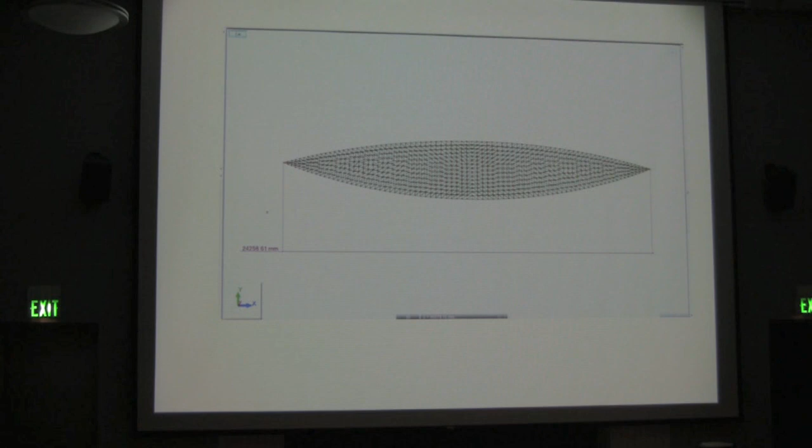So this is the analysis for the pillows. Here's the structural analysis for that. So we're looking at stresses within the films, the fill and the warp and the deflection. What adds to the complexity of this is you have curvature happening in the same direction. Typically, you get a pillow with positive and negative curvature. So you've got to worry about the uplift condition. We actually initially built in slip cables. So 3.5 kilonewtons is the maximum stress ETFE can take at 250 micron film. There's 300 micron available, and then there's thinner sheets.

250 is the more common. 3.5 is the breaking point. So you can see we exceed that with no slip cable. And a slip cable is nothing more than a real cable sandwiched into a pocket; it's a piece of material welded on top to create a pocket, and the cable goes into it. That locks it in, and that deals with our uplift and downward pressures in the extreme cases.

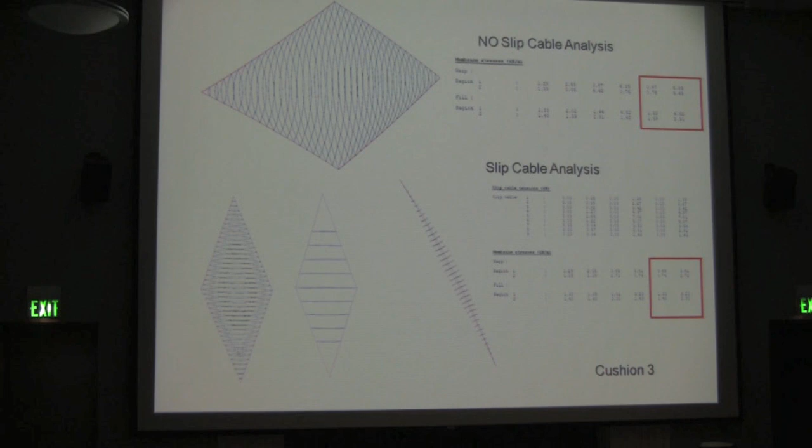So we could identify where those cables go. Now we have developed the formal characteristic of that. Because we were moving very, very quickly, this was an early design assist package, we could develop the worst case and then predict within reason what the shapes would be. And this is just a script that's been written to actually populate the rest of the pillows. We knew what the worst case was, now we can just propagate it.

The project's gone another route now, so we actually are doing the detailed patterning of these pillows. And we've actually been working with the fabricator, so it goes back to my story, always bring in the fabricators early. We've worked with Gartner, Seele, and Vector Foiltec to actually say, look, you don't need the cable, you don't need the slip cable any longer. Let's just double up the sheets. And as long as we know geometrically that the materials are actually sandwiched together and that geometry is perfect, then we know they're going to work as a coupled system.

What you can't have is one more stressed than the other, otherwise you're going to pop that one, and the one that's not in tension won't carry its proper load. So you need them both uniformly tensioned. So we've worked with those guys to now believe that we can actually layer this and eliminate the cables. So now we have the pillows. We can load those into CATIA.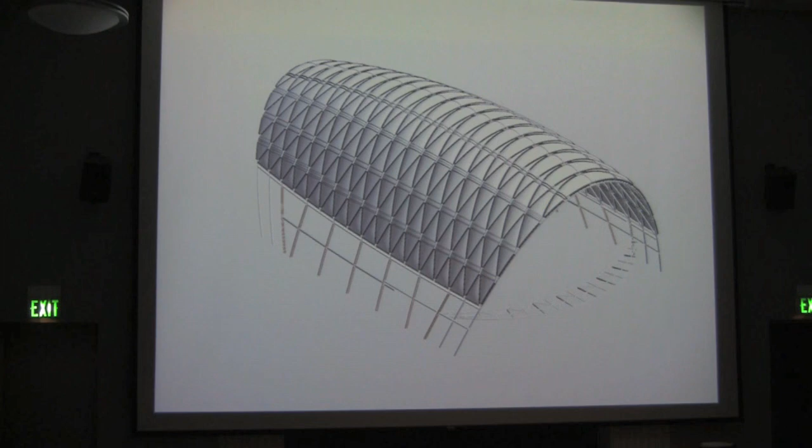And through a little magic, we have now ported this into Revit. So we've now helped them satisfy a key component of their contractual requirement. So it's now in Revit. These are CATIA shots of just the details, so we virtually mocked up all of that stuff. So now we're in Revit. We've got the definition. And we need to work on these side walls and the end walls. So this is the side wall.

And as I said, I'm a big advocate for being software agnostic. So we'll use whatever tool is necessary and the best tool to get the job done. And obviously on a sidewall where you get loads of subtle geometry, loads of layered information, Grasshopper is a great tool because you get the parametric functionality of Grasshopper embedded in Rhino. The middle screen is effectively the Rhino model of that surface developed as 3 layers, and I'll describe that 3-layer system. And then the clashes between the vestibules protruding through that wall system in definition.

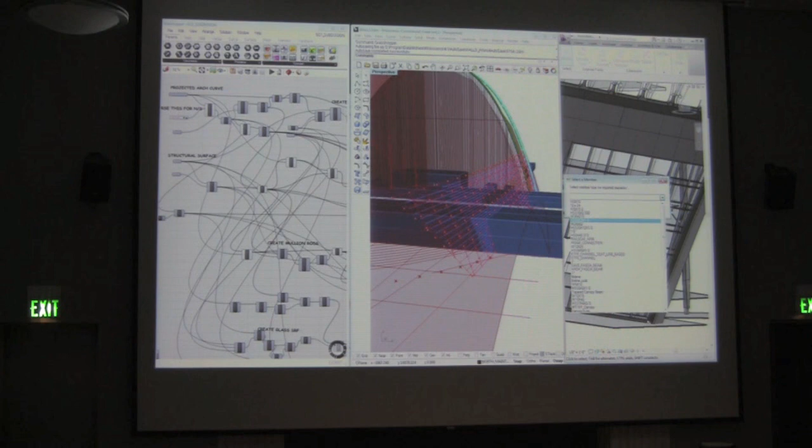Once we can define that geometry, we now have functionality within Revit to import that geometry into Revit, and now we can work on developing the wall. So that's the buildup of 3 layers. There's a secondary structural system to support it. We unitized it on a module of 4x10. So that's the second layer.

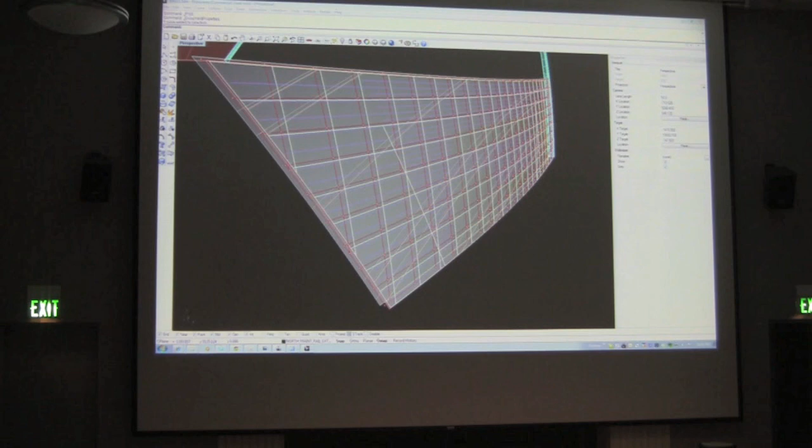And then the third layer, because it's got this faceting that's happening, and I'll talk a little bit about why there's faceting happening, we put a louver on to cover up those facets, because you would always kind of see this fish scaling, and it wasn't pronounced enough to look like it was designed. It looked more like the panels were out of alignment. So it was an overlay to actually cover up that there was a real problem: nobody really caught on that the doubly curved surface needed to be rationalized in a way that accepted flat panel stock.

So just to go back, tools, this tool development, this is Revit and Node Tool, and just a drop down of things that you'll find in our Revit version of how to bring information back and forth. So this is the sidewall, and this is the assembly. You can see here's the vestibules popping through, so that has to be coordinated. You need all those tolerances. Here's the unitized panel, so that's a 4x10.

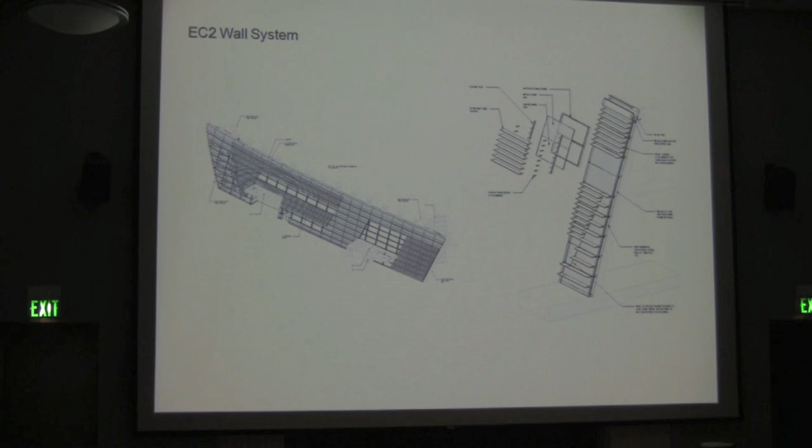Here's the panel. It's a combination of metal panel, perforated panel, and IGUs, insulated glazing units. And then some complex geometry in terms of these fins. And these fins, because they're aluminum, they have to be extruded. So again, they're faceted as well. So the complexity just gets bigger and bigger the more you layer this thing on.

So we can bring in all that geometry into Revit. We brought it in. That's the buildup, the bigger buildup. To define those panels, how would you do that? Well, this is the elevation, and I'll talk a little bit about why the panels, or the flat panel piece, didn't work. Because there was this difficulty about working in Revit, at the end of the day, what they did was they elevated the elevation, and they drew a 4x10 grid, and that's what it was.

Completely not considering that there actually was double curvature, and you had to pick up all of that faceting that had to happen. And it was a late in the day change to go and revise the architectural design. So we pushed it through, and it was only through our work that we realized that maybe we should cover that up, because it's going to look like you got a wall of panels that nobody installed correctly.

So we defined, so this is the elevation of this panel, the node points, the definition of those nodes, and how we described it to a curtain wall fabricator, where they're going to put these panels, where they're going to put the node points on that face. And because this wall is constantly warping, so in other words, it starts this way, and as it works its way back, it's constantly tilting in, so it gets flatter in the backside. We had to describe unique at each of those joints what that geometry line was, and we cut it as section. So that's that definition.

So the project went out to bid. The curtain wall guys were like, wow, that's a super complex system. Why didn't somebody rationalize it? And we said, yeah, that would be great. Let's rationalize it. So we've now gone back, and we're in the process of redesign to rationalize this thing. This is the new rationalized elevation, pure panels. You don't see anything, and it just goes smoothly around. Flat panel stock looks curved.

The other thing we took out was, beforehand, all of the fascia, this metal panel stuff, along the edge, and then the cover at the end walls was all curved metal, which basically meant you had to go to a body shop and get custom coachwork built for this thing. You can only imagine what the price tag came in for this thing. We now are getting numbers back, so there was this number, there's our current number. We've got a factor of 5 between the two. So we've brought it completely in, bringing fabrication intelligence into the process.

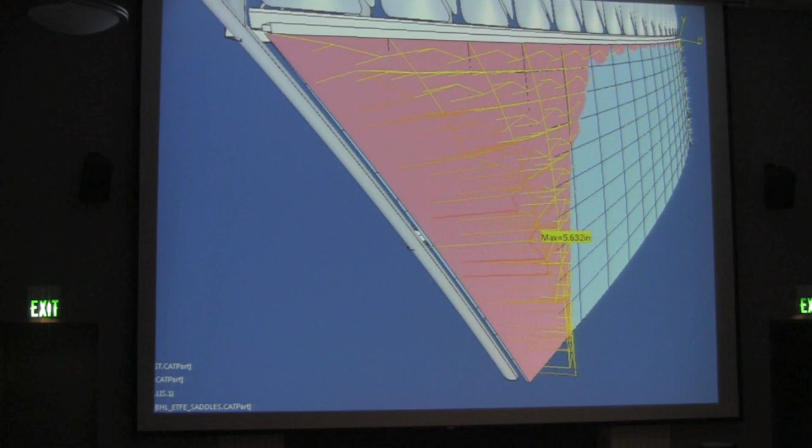So the final piece is now how do you get these end walls in? And again, working in the early days of a project and then working at the end, you're always trying to figure out how the assemblies go together. So we're looking down in plan. We've got these columns that are going to pick up this line of support, which is this pipe. That's the column. And we're going to locate the face of glass, which is the pink line, and then support that face of glass through wind load back to the column. And then the rest of it's going to be hung through stainless steel rods from above.

120 feet of glass. So there's your columns. There's your face of glass. And you can imagine you're trying to align face of glass with a roof system that is pillows. How are you going to close that? What's that closure? How do you actually know what that closure is? One could imagine and draw a detail, but as you go around, that detail's always changing. It's never the same. You need to actually effectively draw it every time. Well, if you had to draw that every time, you'd just say, forget it, let's just do another building. To do it digitally actually gives us that ability.

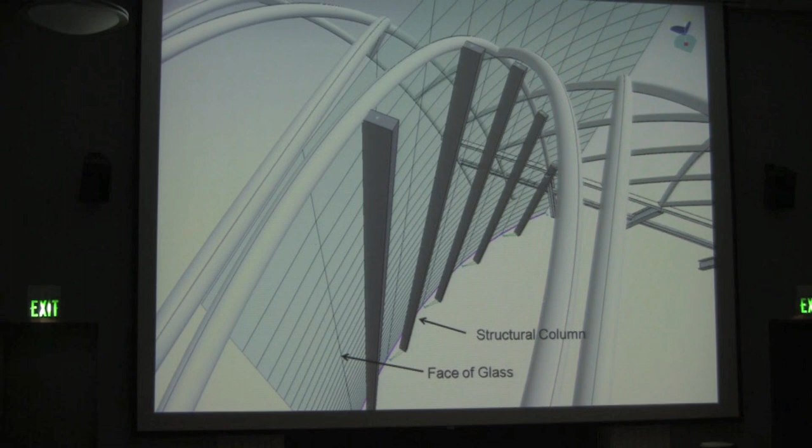So here's your new fascia, faceted, going all the way up. You can see these are flat panels, and you can actually see that effectively follows. You could slightly see that they're flat, but I promise you that they're flat. Here's how we reworked that inside to get these flat panels. You can now see the glass, actually how it's going into the edge.

Another misnomer was, geez, let's unitize this entire facade, it'll make it super cheap. Well, unitize means that you got a factory and you can just plug product through. Because of the curve, you have so many unique pieces, there's no value in unitizing. It's better to build this thing piece by piece because you're going to hang it anyway and you're going to tension it up. And so we've now moved our way into a stick-built system.

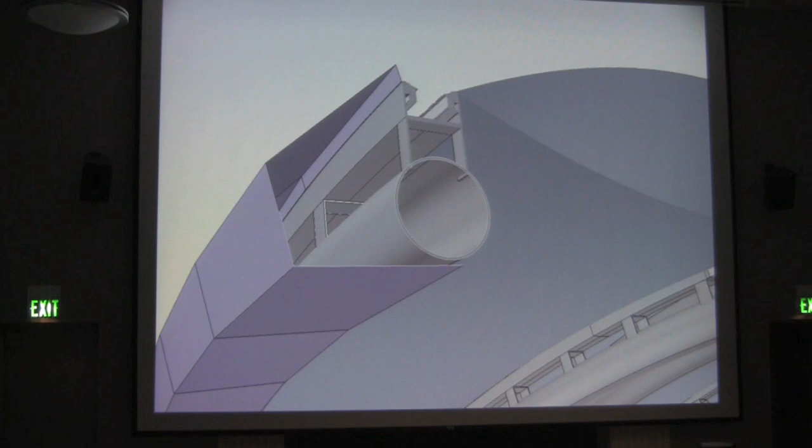The next big piece is the 120-foot wall. The structural analysis is quite important. And the reason why this sat independent for a while was the structural implications were huge. Where do you find value in this system? Obviously, the curvature in plan, it's an arch. We get stiffness out of that. We want to use it.

And so we want to look at the entire glass wall as a structural system as opposed to just a component. So in other words, we don't want to look at it as tension elements attached to armatures to a column and just look at the local and size it that way, right? Which would be a typical approach. That's not a value approach. So we modeled the whole wall.

We used Grasshopper to generate the geometry. We're going to Robot. Robot actually has a pretty robust solver for complex geometry, so we're in Robot. So you can see the columns loaded. We panelize it so you get the panels in there so we can actually collect wind loads. So we're going to run this thing.

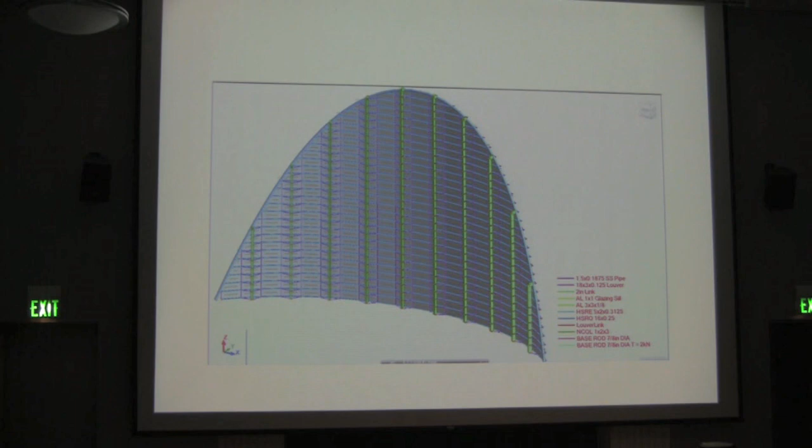We can get the details so you can see the armatures. This is the old model when there were armatures at every 4 feet. We've now eliminated a lot of that, and I'll show you the final. Here's your bending moment in the backup wind girt. This is the horizontal transom that goes around. This is the moment within the column. And this is the visualization of the deformation.

Why is this important? If you actually are talking envelope, you worry about what that joint is and the performance of the joint. How much movement am I actually dealing with? This is the visualization of that movement so that we're all very, very clear early on what the building is doing, what's happening at the joint.

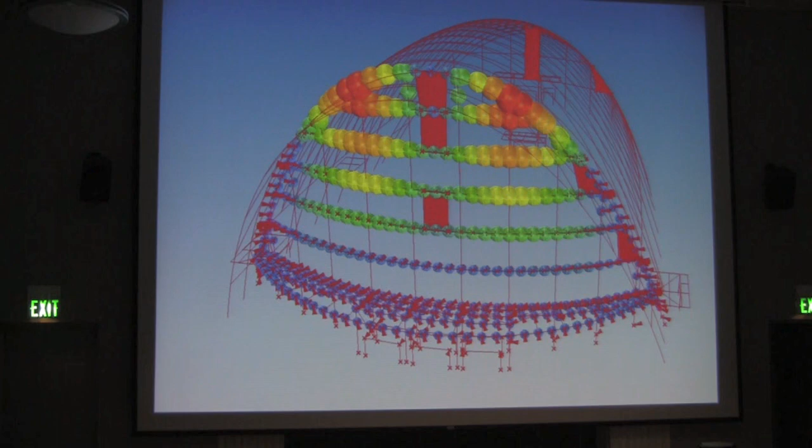Here's the numeric part, so we can look at the componentry and actually understand what's happening at the component level and what's the deviation or the variation, the differential between components. And so now that's the entire assembly built up into Revit. So you got the end wall, side wall, ETFE, faceted panel, all plugged in to the model. And as I said, early days on the sidewall, but value add.

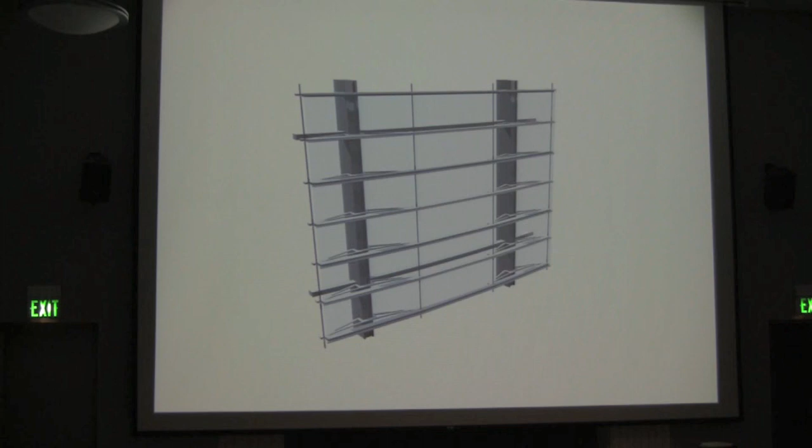And then just a blow up of the detail, here's your tension rod. So effectively, gravity is being handled going up to the large vault. And then looking at the elements, you can take a look at these things in a simplified way, or in a complex way. We're cutting these from plate steel, so another value-added feature. Before, we had all this customized aluminum stuff, but you can get really high quality product using a CNC process, cutting it out of plate material, and then doing a relatively nice finish on that material. So we're sizing those.

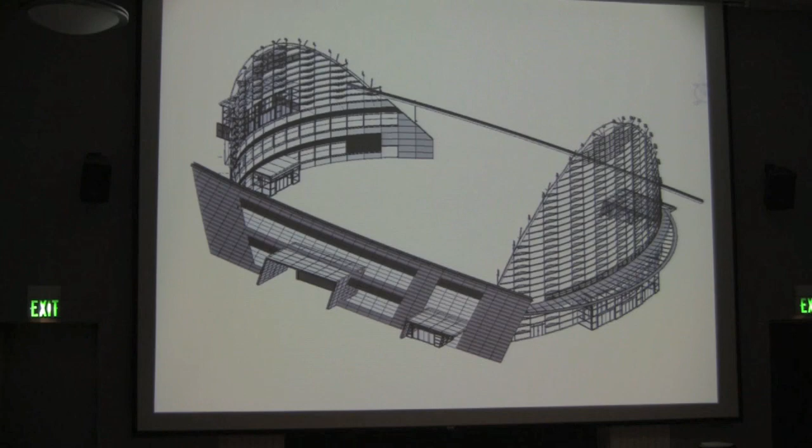And then there's your final building without a roof, just to show the end wall cases and the side walls. And then your final picture.